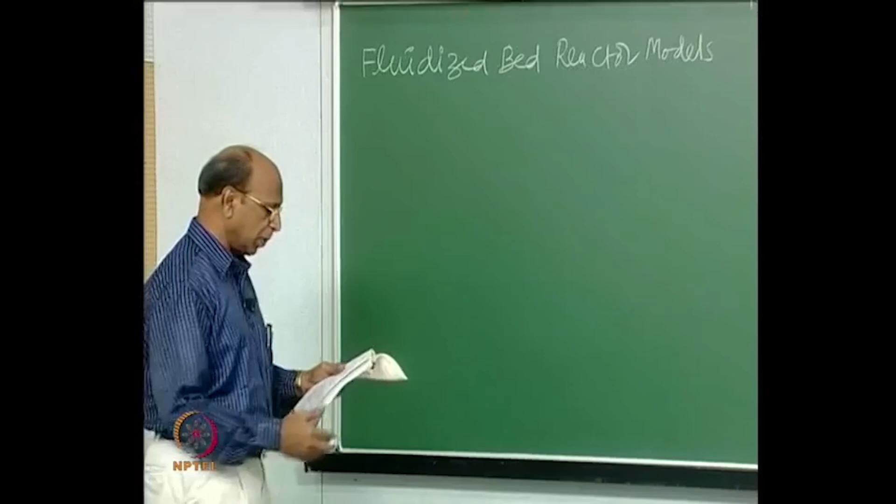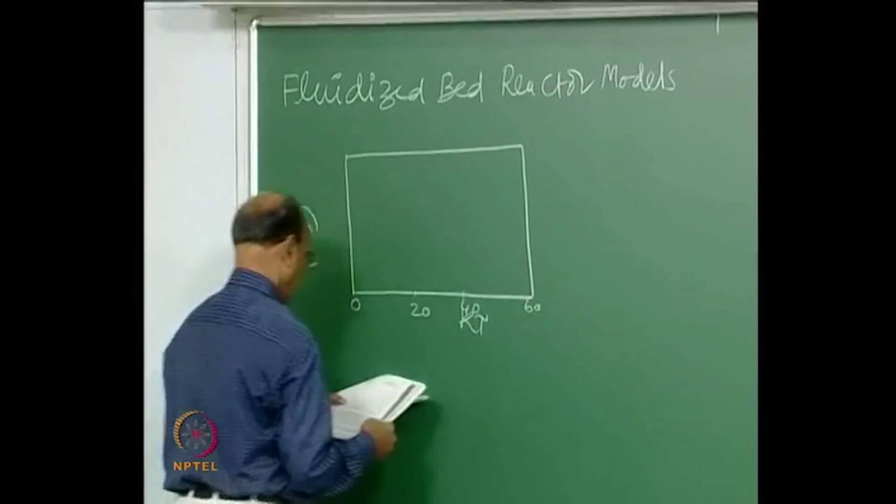When we plot conversion versus Damkohler number, this is 1 minus x a, k tau is the Damkohler number for first order reactions. This will be 20, 40, 60. Here you have 0.01, 0.1 and 1.

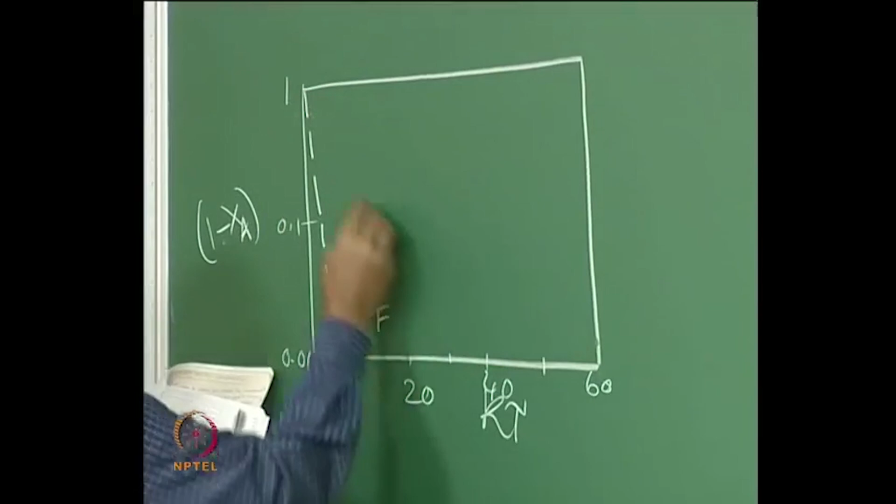This is the straight line, this is the plug flow line. This is the mixed flow line, and the points what we have, okay.

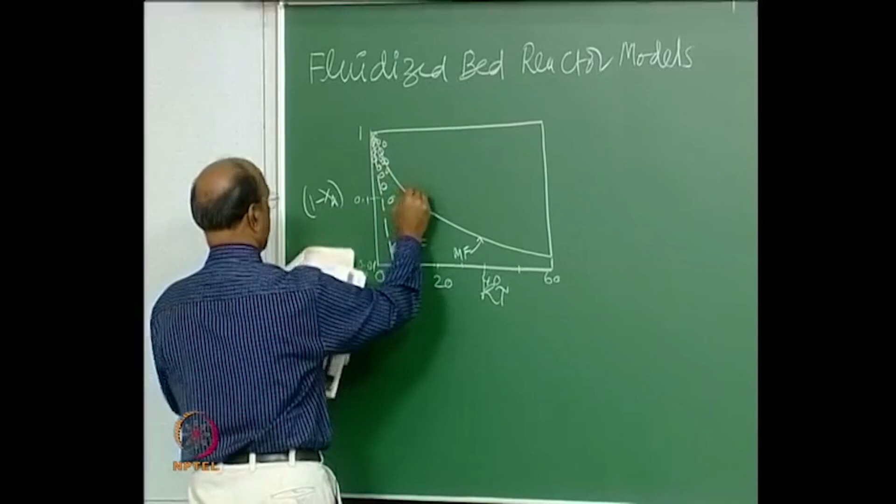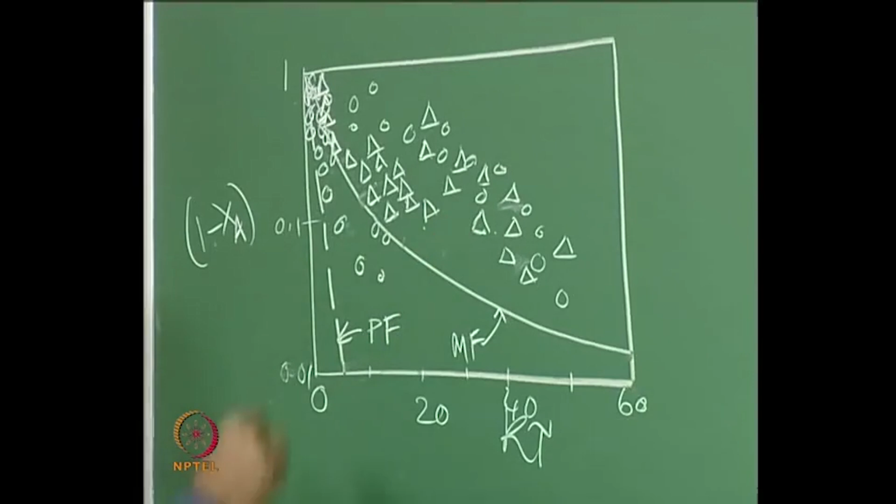This is one category of particles, and we also have another category, triangles, I am putting. Okay, so this is the kind of behavior, and the circles are

Geldart A particles, A group, Geldart A group, and the triangles are B group, and some of them are AB group also. AB group means the borderline between A and B.

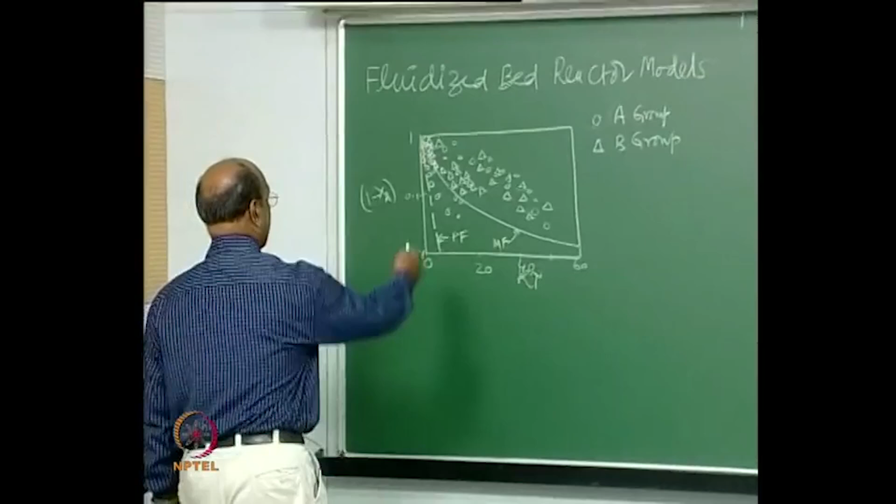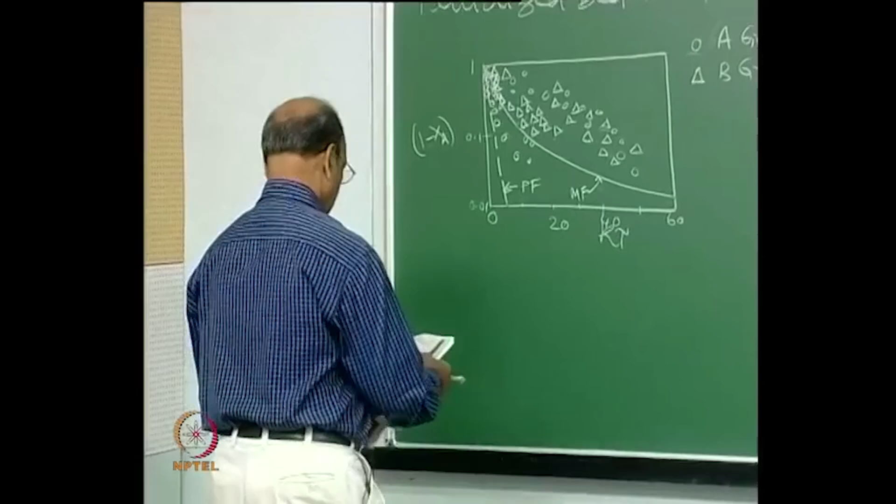So under these conditions, I think the researchers could not predict what is really happening in the fluidized bed, because this is mixed flow, this is plug flow, and many points are away from the mixed flow reactor. So that means there is something serious happening in the reactor. If you look carefully into the reactor at what is really happening, one should find out, otherwise simple models like mixed flow and plug flow cannot predict the conversions. So that means the first attempt, like our ideal reactors, failed, that is one.

Ideal reactors failed in the sense that they could not predict the conversion, right. So then logically the next one is single parameter models.

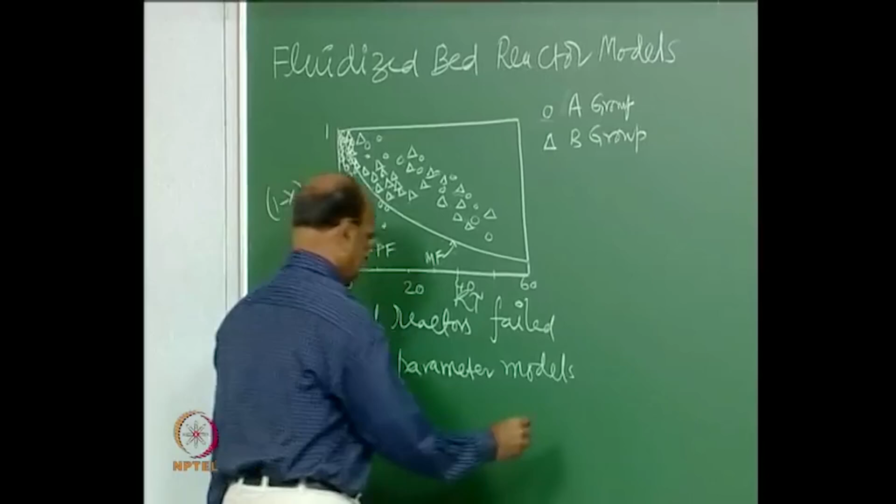Models like the dispersion model, and the tanks in series model.

Recycle model is not valid here, because what is recycling there, it is not right. You should have an external recycle and again come back, that is what recycle model is, but here that will not arise. So it is only these two models that have been tried.

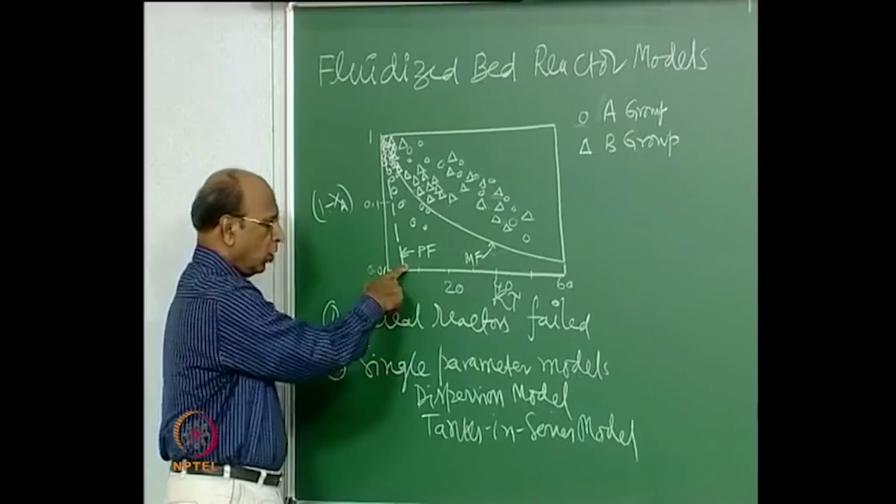So even if you want to predict these two, this is zero mixing, no, this is infinite mixing, this is zero mixing, plug flow. So all these models should also be somewhere in between, right, because this is intermediate mixing. These two models will give me something in between, like if dispersion number equals 0, it is plug flow, dispersion number equals infinity, it is mixed flow.

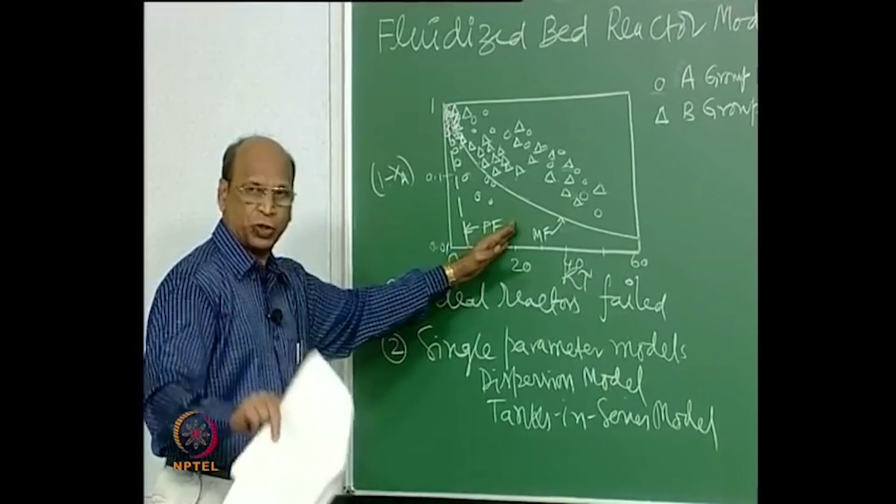So that means even these models, if they are really valid, all the data must be somewhere here, but not away from this boundary, right. So then people tried RTD models, that is number 3.

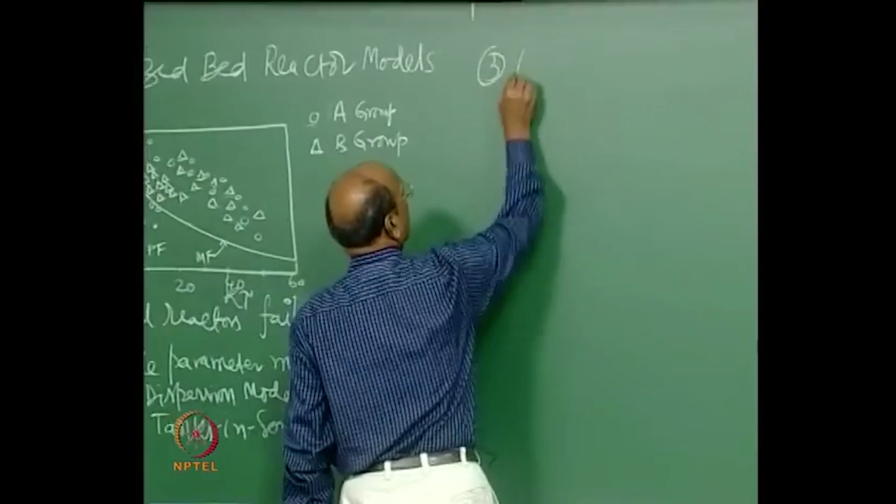Please remember, even though we discussed these two under RTD models, just to understand easily, even without RTD I can derive this dispersion model and tanks in series model, right. You take one tank, next tank, what is going in the first tank comes to the second tank, goes to the third tank, everything is perfect mixing.

And when you go to the dispersion model, you take ideal plug flow, and over that you put the dispersion term. So that means the Fick's law term, D effective diffusive, or diffusivity, multiplied by dou C by dou Z term will come along with your convective term.

Okay, I think this is what in packed beds also you have seen, we have so many terms. If you are able to take only the axial dispersion term, convective term, and reaction term, that equation can be solved. I also gave the solution for first order reactions in the last class, in the last semester.

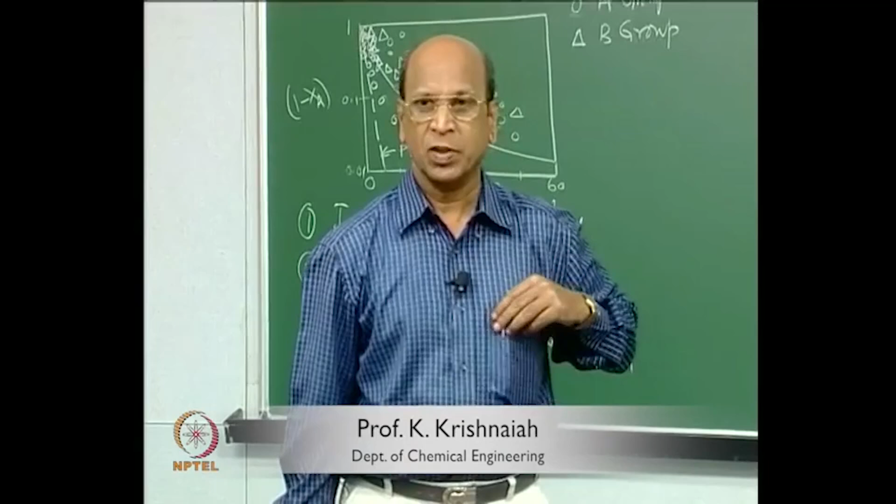So that is why it need not be categorized under RTD models, because you may be thinking, this fellow discussed these two under RTD models last time, and now separately he has written these two as a separate category and RTD model as a separate category. RTD models, the way we are discussing here, mainly take dead space into account, channeling into account, bypassing into account. Channeling and bypassing have slightly different meanings. So taking all that into account, RTD models have been tried. But RTD means residence time distribution models, right.

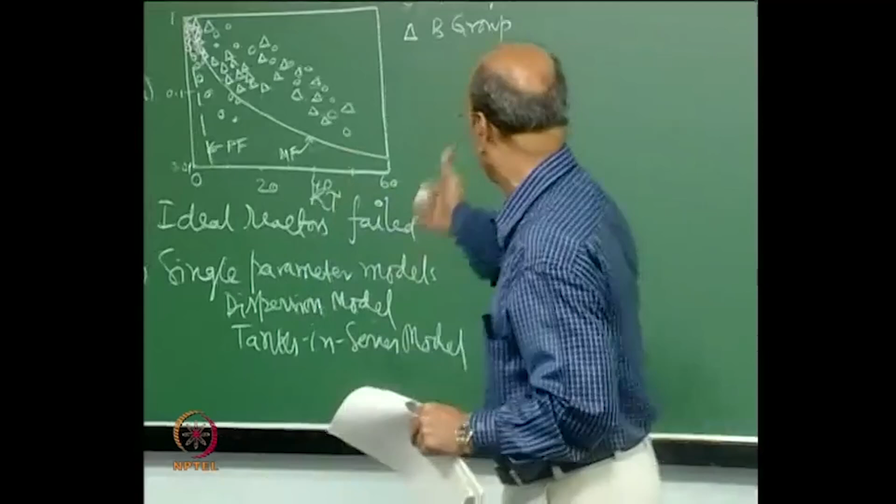When you look into the fluidized bed where the solid particles are catalysts, if you look a little more closely, we have bubbles and we have solids. If there are no bubbles, wonderful, because every particle would be contacted by the gas, and you could clearly find out what kind of mixing is going on, whether it's a single parameter model or ideal reactors. But without bubbles, even fluidized beds cannot exist, because to have a little mixing of the solids, bubbles must form.

You cannot operate exactly at minimum fluidization velocity, because then it becomes mostly a packed bed. So when you go away from minimum fluidization velocity, bubbles will form, and particularly in large diameter industrial columns, they operate at 20, 30, 40 times minimum fluidization velocity, because they want to keep all the particles under fluidization conditions. That is why that extra gas is definitely necessary.

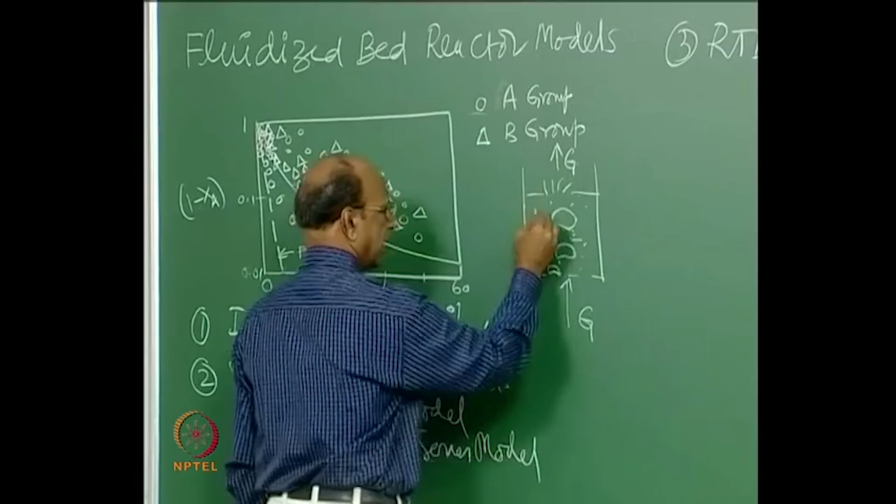What I am trying to say is that you can never avoid bubbles. So that is why in the RTD models, let me draw a simple fluidized bed here. Okay, this is enough, three bubbles, these are the particles, and one bubble may be breaking here. So, gas enters, and these are the catalyst particles. Most of the gas is going in the form of bubbles.

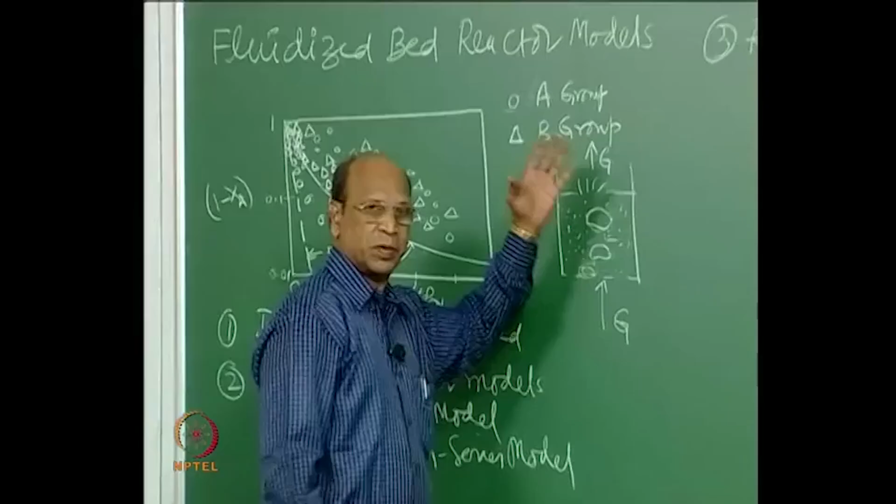Whatever gas is more than necessary for minimum fluidization velocity, all the extra gas goes in the form of bubbles. That gas will contact only the solids around the bubble. This means the gas in the bubbles will see only a small number of particles. So the residence time or contacting time between these bubbles and the solids is very small, because bubbles are moving up, whereas in the emulsion phase, the gas is moving at minimum fluidization velocity, which is very low, so there is sufficient contact there.

That means, if you remember the RTD equation for first order reactions, what is the equation for conversion using the RTD model?

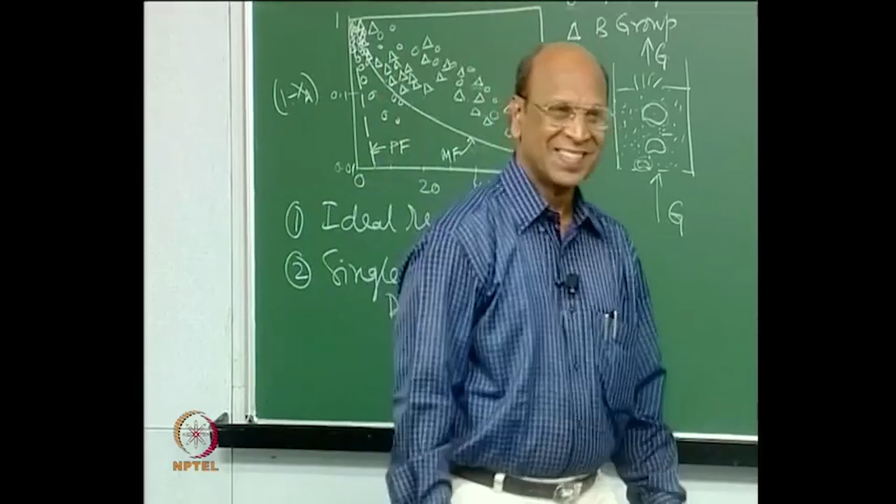First order... Abhinav, are you telling something? Yes, 1 minus xa equals, for first order reaction using RTD... that is all, e power minus k tau. e power minus kt into e of t dt, integral 0 to tau, 1 minus xb of a single particle. What is this tau? 1 minus xb of a single particle, you are thinking of a non-catalytic reaction. I am asking in general for first order reactions, what is the RTD expression? See how many times I am right, that is only remembered from that semester, afterwards no.

Okay, I think Abhinav was telling something about the integral. Before the integral, what do you have? 1 minus xa, let's take that, okay. C by C naught of a batch reactor, into e of t dt. Excellent, but not 0 to t, it's 0 to infinity, not tau.

So that is the equation we have: Ca by Ca naught batch, for a first order reaction. What is the equation for Ca by Ca naught batch? E power minus kt. That k is the reaction constant.

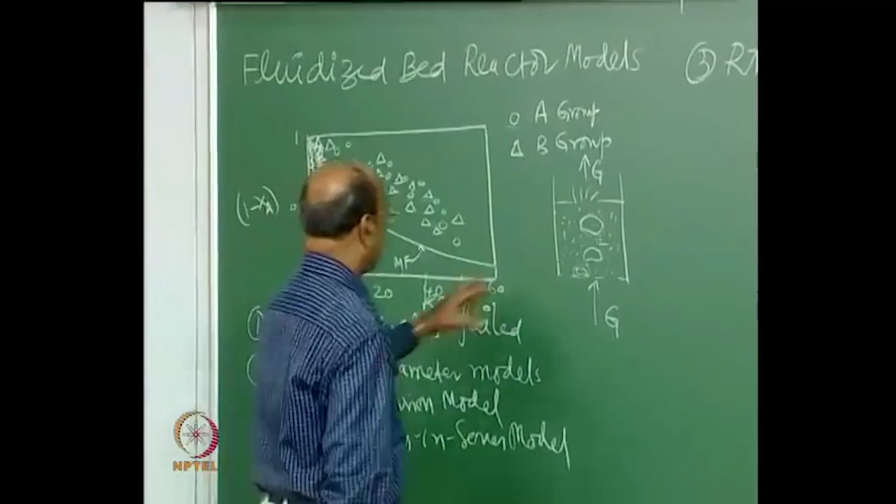So that constant will be different for the bubbles, because the contact time is different, and that constant will be different for the solids in the emulsion phase. This means you need two constants: one small constant accounting for the bubble movement and the solids surrounding the bubble, and another where the k is slightly larger for the emulsion phase. That is why getting this information from RTD models becomes a big problem.

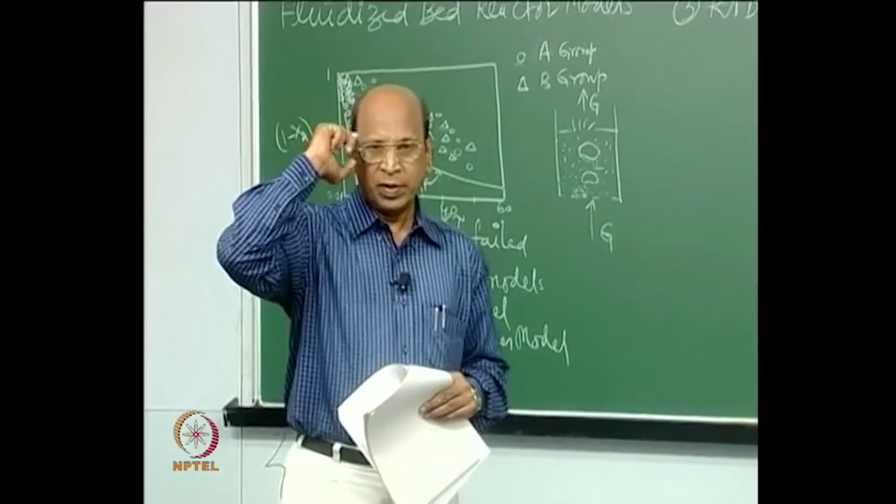So then they abandoned that idea. The RTD models also cannot predict this, because we don't know the exact k value, since we need two k's: one for the solids surrounding the bubbles, and the other for the particles in the emulsion phase. So the emulsion phase is contacted by gas in a different way. This is actually a beautiful lesson for modeling. Fluidized beds are a wonderful lesson for modeling, showing how you look deeper and deeper, and finally what do you do.

So initially all of us start only with ideal reactors, but they failed. Then the next simple step is trying to find out whether single parameter models can predict the conversions, but they are also not sufficient. Then slightly more complicated RTD models, but we also have problem because we are not able to get two k's for this. So it is the same information, same equation, same information, but RTD models failed.

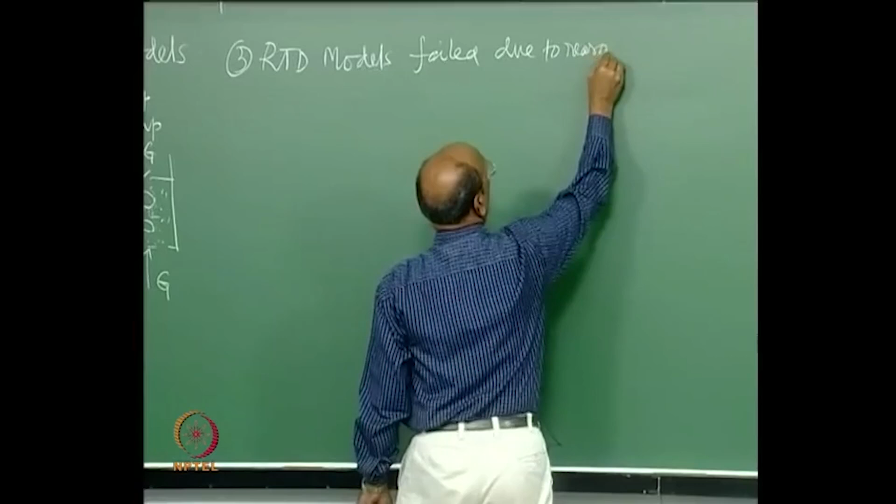That also I will write. Failed due to reasonable k value, I hope you understand. K means reaction rate constant value. Reasonable k value means whether it is a small constant or large constant depending on the contact, the bubbles or the emulsion.

So then the same information someone started calling that as CTD models. Heard of CTD models? RTD is residence time distribution, CTD is contact time distribution. These are the new class of models which are used only for fluidized beds.

Actually, that will be a good term even for us. What is our contact time distribution? How many classes you come, at least physical contact. Mental contact I do not know, unless we go to avatar and then put your pigtail and my pigtail together, then only I will know mental contacting, but otherwise physical contacting is only, yeah.

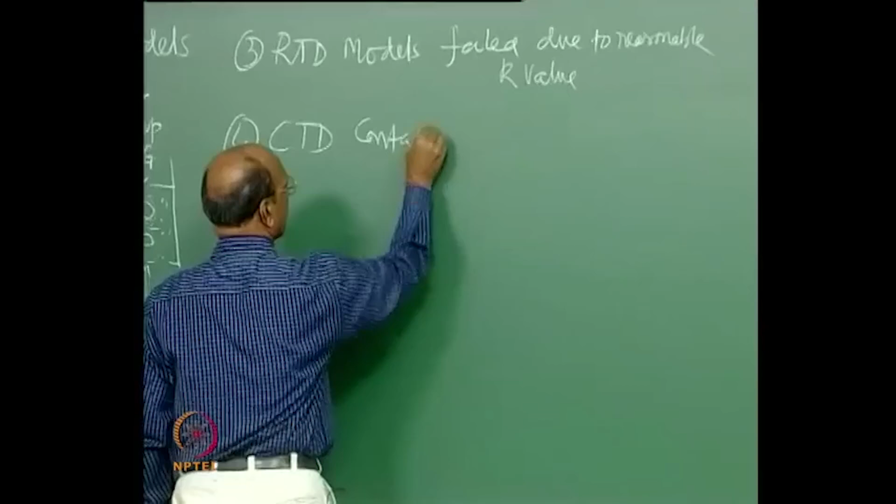So this is contact time distribution, distribution models. So here in the contact time distribution models, they assumed it is the same thing as RTD only, but I think only some researchers, which at this present time you may not be interested in.

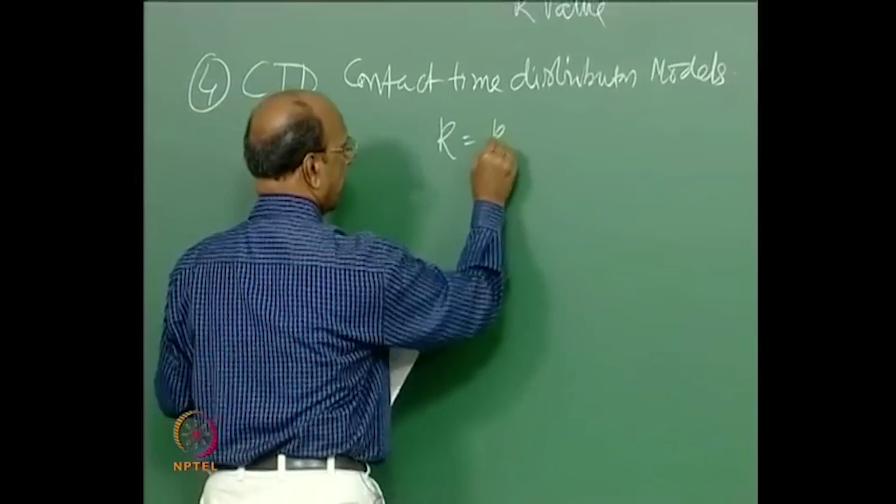So what they have taken was a k, that is, k equal to k0 t to the power of m, where m is the fitted parameter, depending on large contact or small contact. So this equation they have used with a meaning.

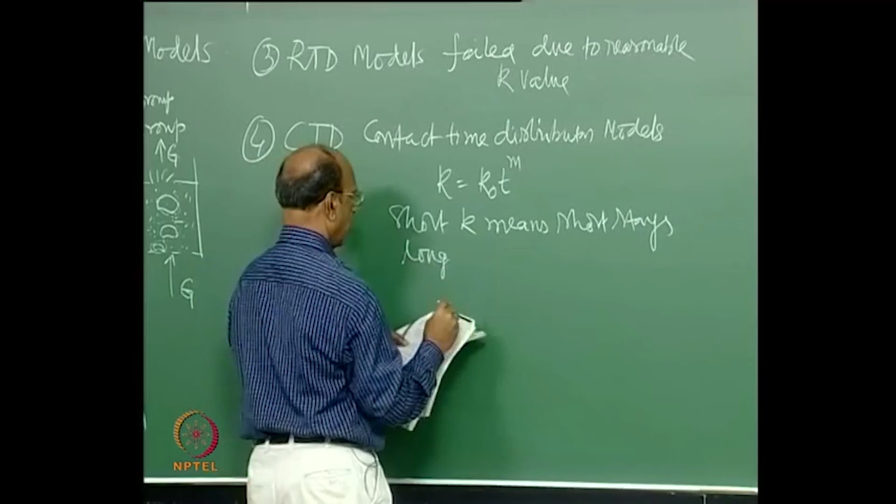Short k means short stay in the bed, that is bubbles, long stay means large k means long stay. So you can now see this must be bubbles, and around bubbles this must be emulsion.

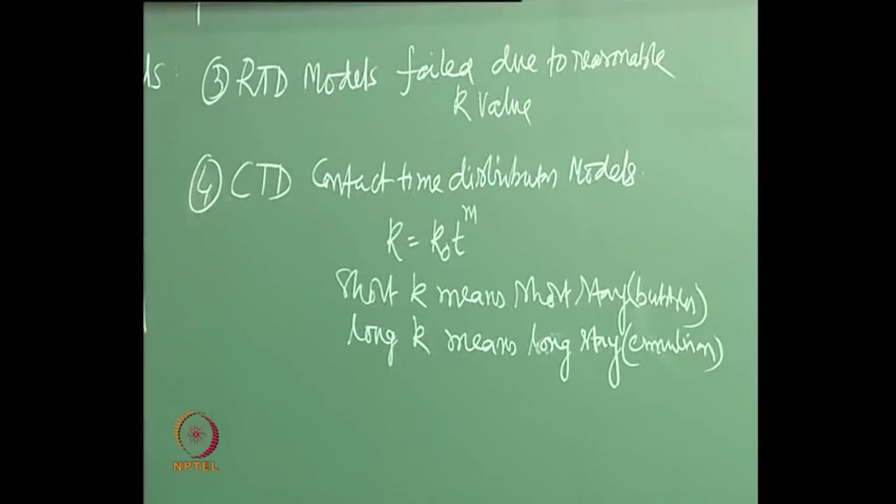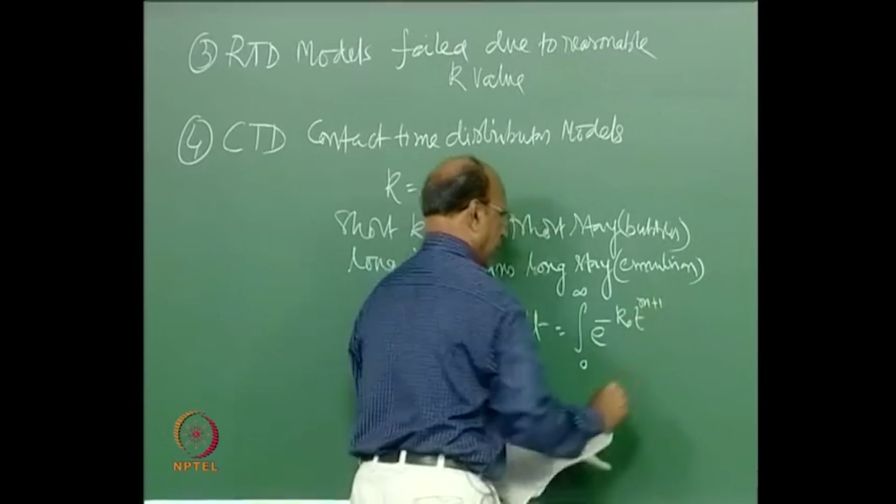So now you can see that your equation, C A bar by C A naught, equal to integral from 0 to infinity of e power minus k t, e(t) dt. Straight we have taken e power minus k t because it is first order, we are talking about only first order. This also can be written as integral from 0 to infinity of e power minus k0 t to the power of m plus 1, e(t) dt. This is straightforward, correct.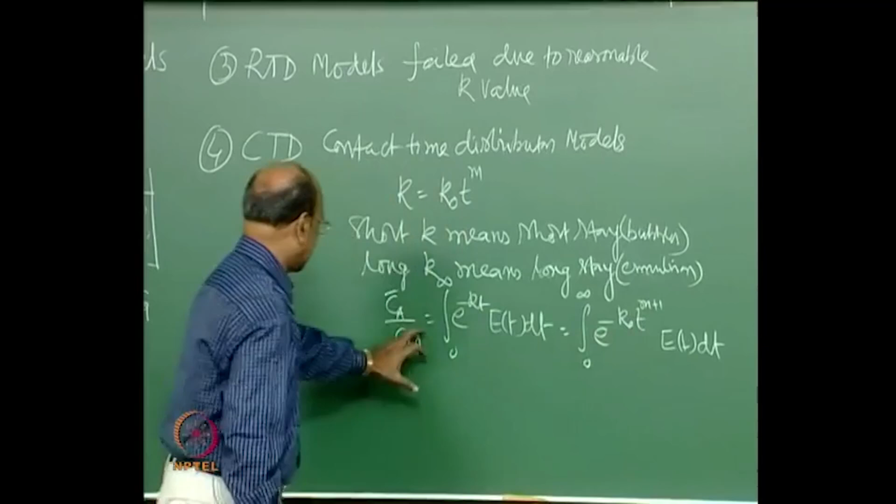Now we have substituted for this k here, k0 into t to the power of m. So then what they are trying to do is you have now 1 minus x a, and you try to fit this m, so that you will get, t to the power now m plus 1. So the m you adjust such that your x is described or predicted by this equation, but they found another problem. What is the problem?

The problem now is how do you get E(t), this residence time distribution function. How do you normally get E(t)? You have done the RTD experiments, no?

Yeah, concentration versus time, and then get area under the curve. Then divide each concentration by that area, you get E(t), and E(t) dt will give you the fraction of material which stayed between time t and t plus delta t. So that is the definition we know, but the problem in fluidized bed is there also, when you are doing, fortunately you are doing with the liquid, right.

So then once it comes out, you put in the outlet a probe or try to collect the sample and then analyze. Did you use probe or collected samples? I think in our labs, Prabhu, do you remember? I think we did some collected sample and titrated. Collected only and titrated, okay. But did any others use some probes and all that? In Osmania University you used probes.

Oh, here you are now trying to change. You already changed, okay. But you changed it, is it used for BTech next time? Next semester it will be. Next time, okay. So that is the one, I think that was the simple one you have been doing for a long time back, and I don't know what happened in between. I think the tracer used is CCl4, I mean NaCl.

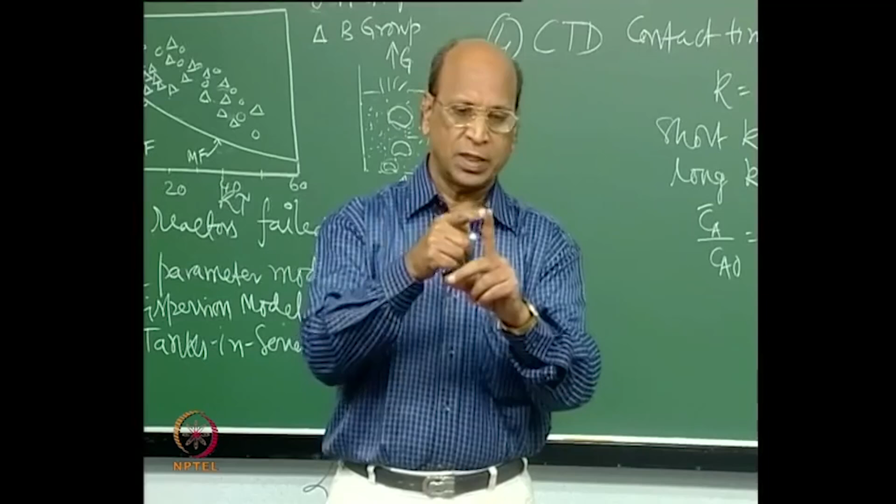Okay good. So the important assumption there is, once the liquid crosses the probe, it cannot go back inside. It is only once-through flow. So whichever tracer you are collecting, once it crosses the measuring port, it cannot go inside again. If it goes back, then it is hell, you do not know how to characterize it.

Another peculiar thing for RTD is we always talk about only one inlet, one outlet. The theory becomes very complicated the moment you have multiple outputs, even with single entry. If you have multi-input and multi-output, you'll have much more problems. That's why no one uses these multi configurations, but logically for chemical engineering, a reactor will have only one inlet, one outlet. Why should you have two outlets? In general, all the time, that is a good point.

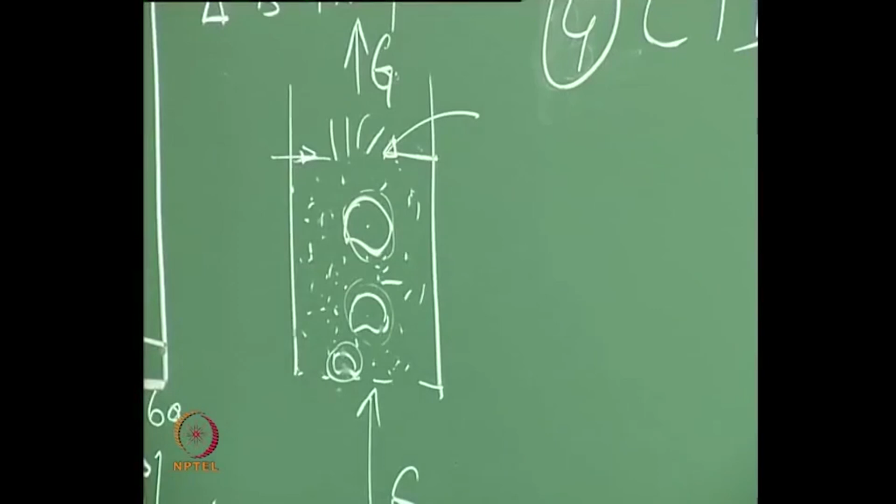But here what happens is, when the bubbles go, you put the probe somewhere, maybe at the center, or put some 4 or 5 probes across the cross section. What happens is, when the bubbles go, they take the solids with them, go to the top, then come back, because they just go up, break, and then solids come back down. I will also give you a figure, this explanation will vary.

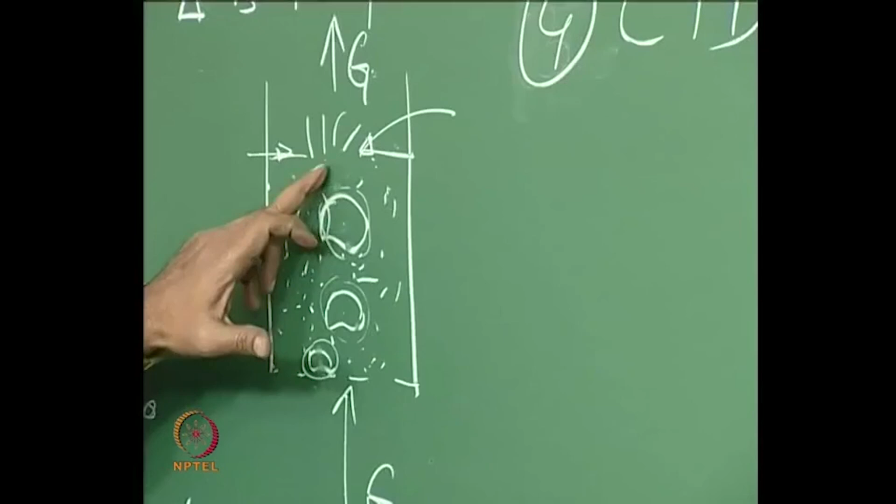Normally the gas will try to find a shortcut through the bubbles, because resistance is less, no solids. There may be 1 or 2 solids which get caught, but most of the time gas will try to bypass through the bubbles. But when the bubble is moving much faster, it does not allow the gas to bypass, instead the gas tries to recirculate like this when it is moving faster.

It's like circulations, when you stand near Mount Road for a bus, assuming it is midnight, 12 o'clock, because there's no traffic and vehicles go very fast. Otherwise, here more than 5 kilometers an hour no one can move, right now if you go. So there you cannot see this effect. When the car or bus is moving very fast, behind it you will definitely see some kind of low pressure. You yourself will feel this when it is going fast, like trains going and we are standing on the platform.

So that is a kind of bringing back the air which is very near to the surface. This has been proved by Davidson and others theoretically, I will give you that some other time. So this gas will go, break, and again try to come back. That means once it crosses the probe, it is not leaving the bed, but coming back again. You already found out its residence time, but the same packet of gas is again coming back.

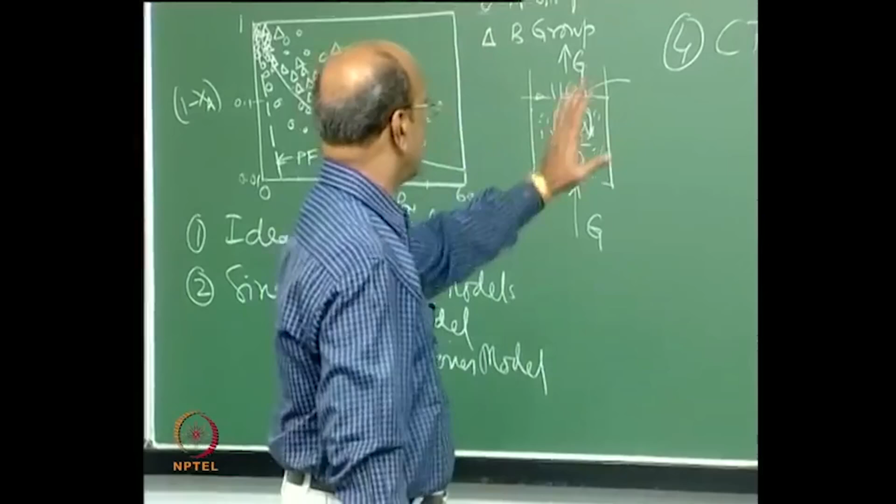So you're not able to find out what is the meaning of actual E(t) - what is the definition of E(t)? Again, fraction of material staying between time t and t plus delta t, but which delta t do you take now, because the flow is going out and again coming in, going out, coming in. That is why people said CTD models, RTD models both failed, because this is RTD information. So this also failed because the E curve failed.

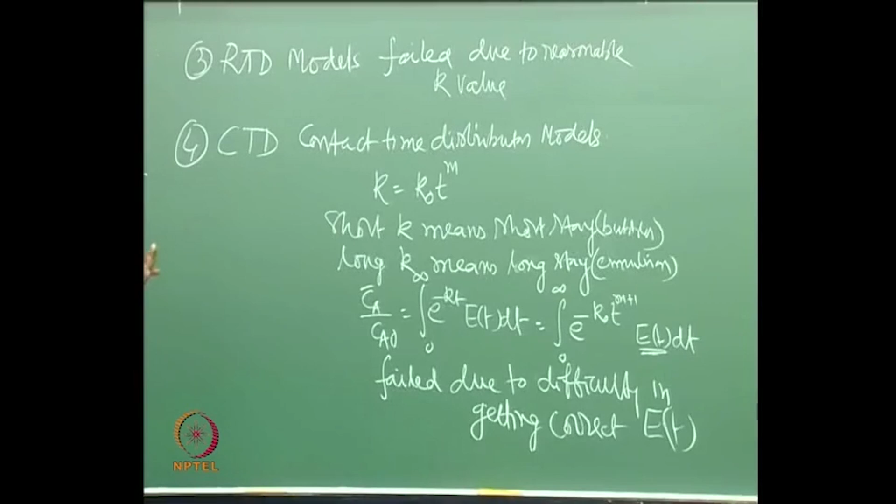Due to difficulty in getting the correct E(t), the residence time distribution function. Earlier it was the K problem in RTD models, but here it is the same problem, which we had forgotten in the beginning. This problem also exists even in RTD. RTD models failed not only because of the K value, but also because of the E value. Here we are specifically saying it is due to incorrect E(t) which you are measuring, and without measuring correctly you cannot have any equation for this kind of complicated system.

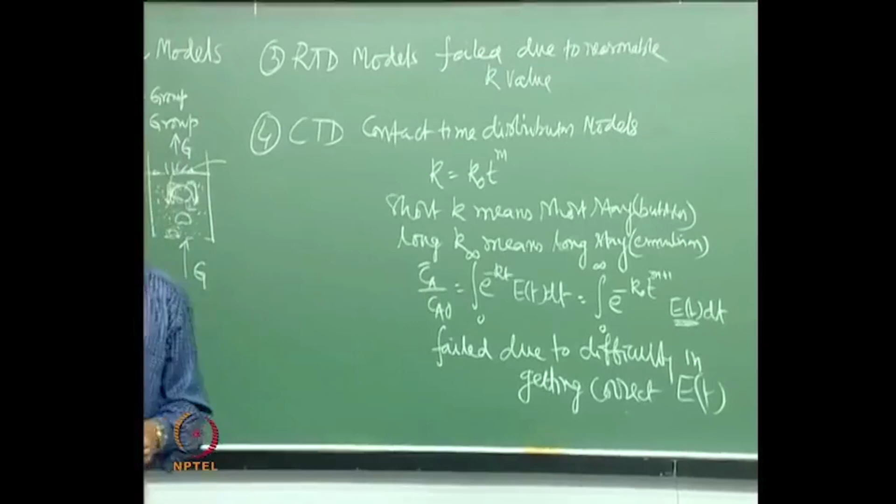Then people ask, what else now do we have to do? So what else can you do now? All simple operations have failed.

What is the next one? People really thought, okay, now let me go and see what is really happening. Till then it is imagination. Some bubbles are there, bubbles are going, right.

So let us really focus on the phenomena that is happening in the bed. That is what I have been telling all the time in my classes, that the physical phenomena is much more important than the mathematics. If you understand that, then automatically mathematics will fall in line, right.

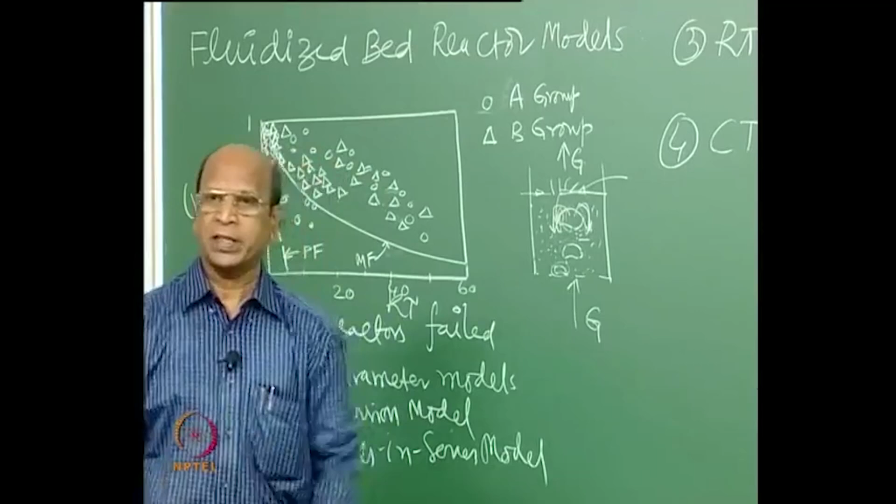So here a little bit deeper they wanted to look into. What they thought was, bubbles are there and emulsion particles are there. Now they thought, let me separate all the gas as one compartment, all the solids in another compartment, and some gas is going through this gas compartment, some gas is going through this emulsion solid compartment, both of them are coming and meeting there, but for the reaction to take place there must be some transfer of this reactant from the bubble to solid.

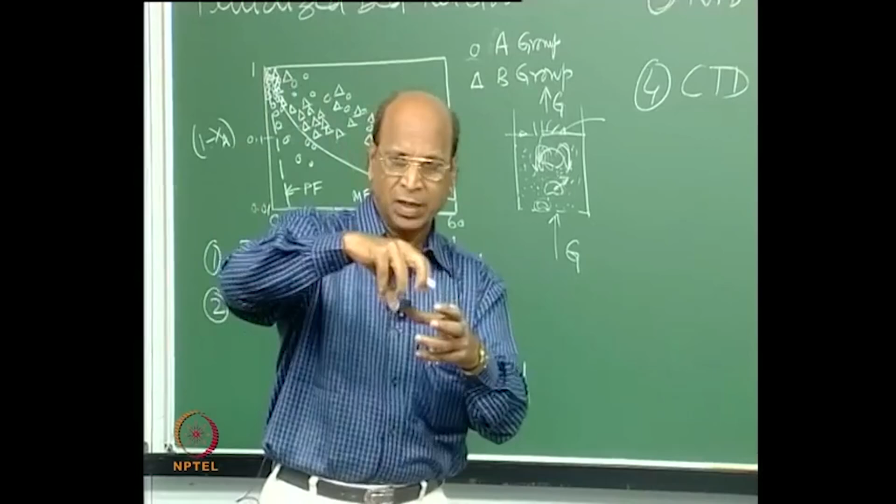You see, the physics is very simple if you are able to understand. The gas is moving in the bubble, but there is concentration gradient in the bubble, naturally, because reactant is maximum here only in the bubble. So it moves to the emulsion because of the concentration gradient diffusion. So then there is some transfer of gas from bubble to the emulsion.

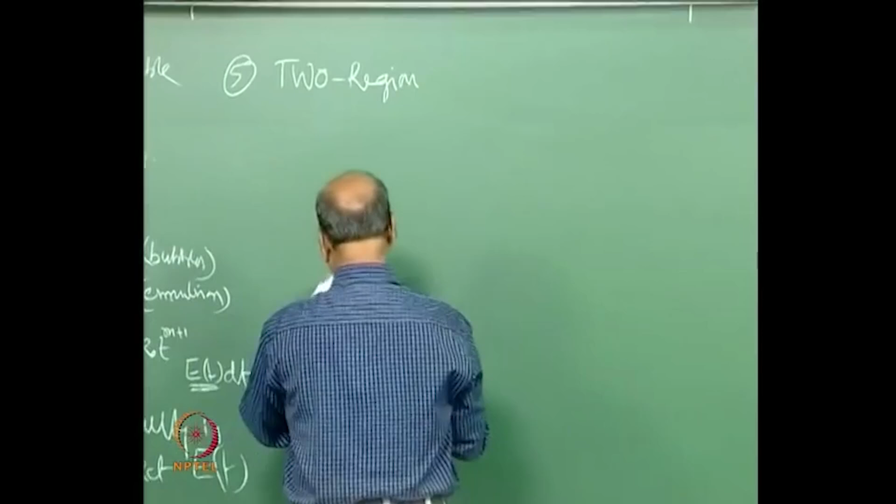So imagination now is, let me take bubble as one compartment. That is called two phase, two region model. Two regions or two phase also sometimes called, but two regions, that means bubble region and also solids region.

So imagination is, we have this is bubble region, this is solid region. So you have the amount of gas, this is V naught, volumetric flow rate, if you take this will be V naught. So then anyway it has to come, because what you see is at the outlet.

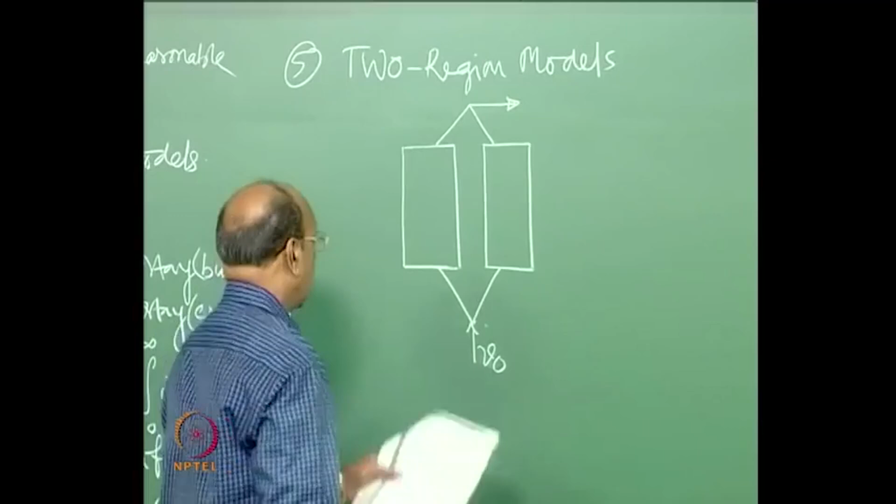At the outlet again you are not seeing these two separately, it is only your imagination, that is why model is always our imagination. So model becomes reality when you have mathematical description for all these things inside the bed, right.

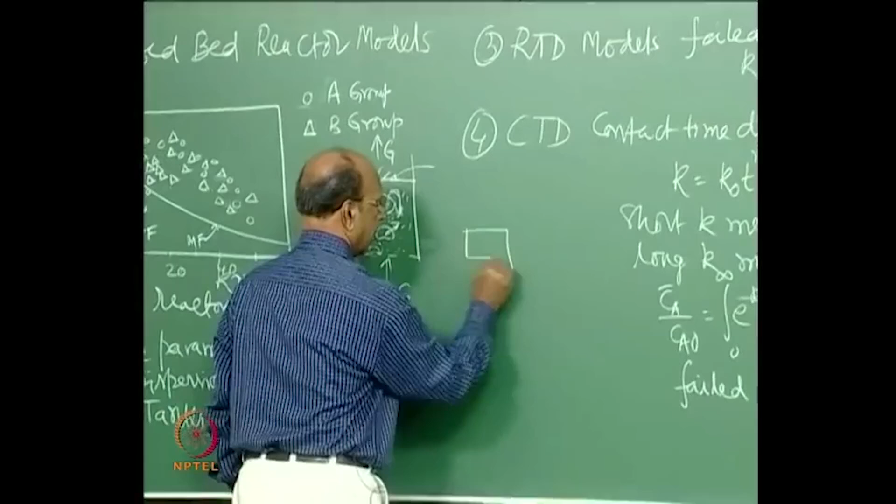So that is why again I will make you understand, when you go for your RTD models, we have drawn for CSTR with dead space and bypass. What did you do? You have done, this is the active zone, this is the dead zone, this is entering here, this is leaving here, and then this is dead zone, this is bypass zone. But what is this actually?

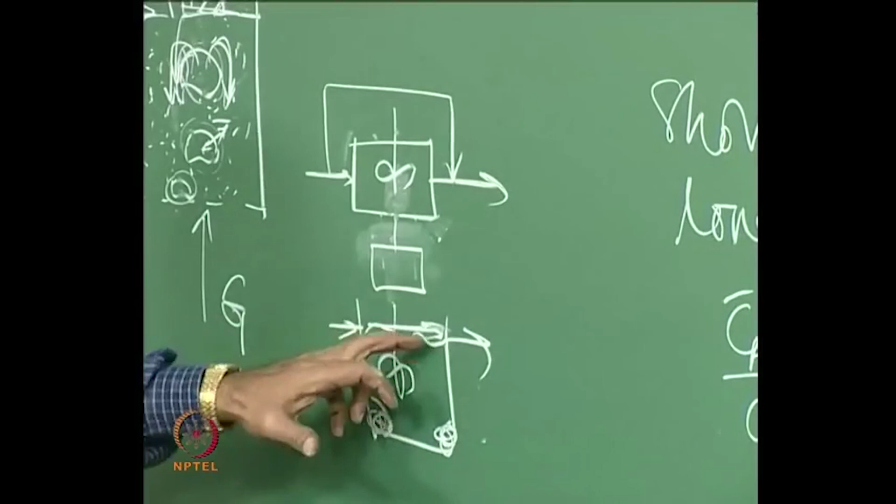Actually, I have a CSTR which is entering, which is coming, this may be dead zone, here it may be bypass. So now you see our imagination is, all this volume has put as dead space, all the other active volume is put as active space, and now whatever is going very quickly short circuiting, very quickly going out bypassing. So very quickly coming out, that is shown like that, because it is practically not spending any time inside the system. So this is an imagination.

So if I am able to write this and this and this, what are the equations, how much is entering, how much is leaving, and if I am able to solve what is happening inside this mixer, and then I have an equation, that equation is finally matched with my actual conversion in this reactor. So if this is matching with this model, then I think that I have bypass, I have dead space, and so much bypass, so much dead space is there inside, that is why the conversion is so much. That is what is the imagination.

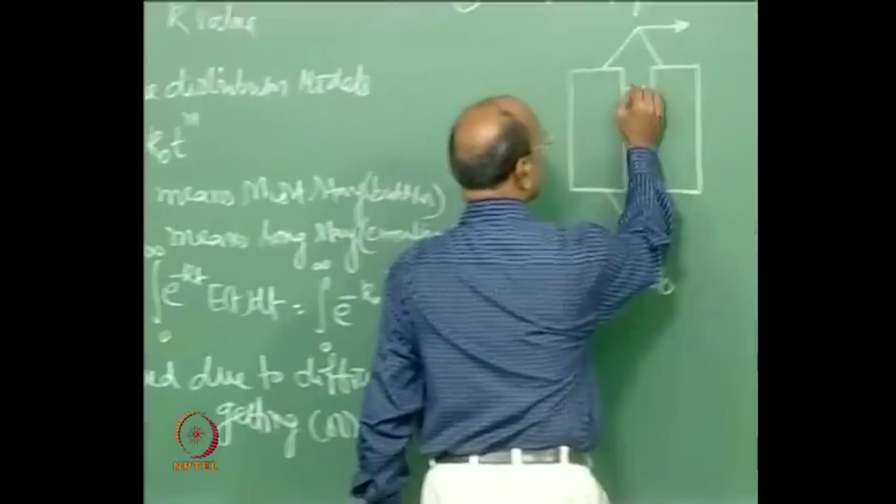So similarly here also the same imagination, all the gas in one region, all the solids are in one region, then we have the cross flow. So now this V naught will split into V1 and V2, we do not know how much. So then these volumes also we do not know exactly. So that is why we also just float as V1 and V2, capital V1, volume of gas region, volume of solids region.

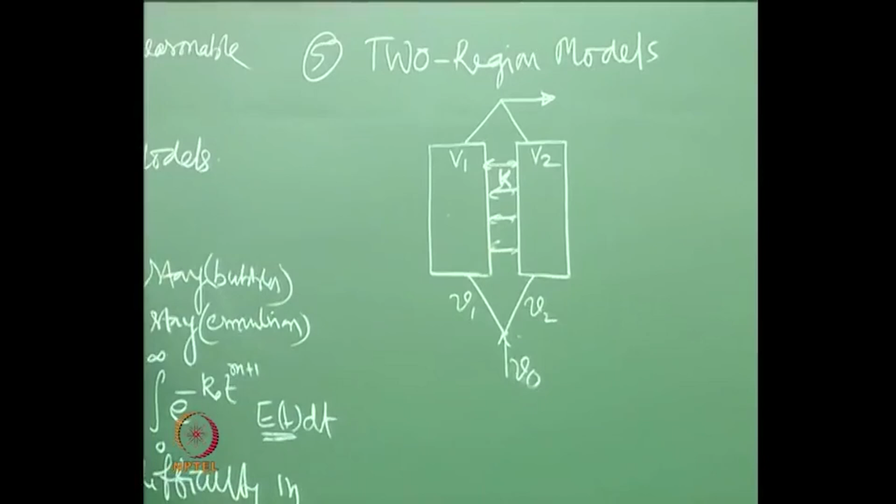Okay, good. Then this cross flow we will call as K. That means how many volumes of gas that is going into this. So that cross flow also we will take. Then in this region there is a flow, all the gas region there is a flow, all the solids region there is a flow for gas, right.

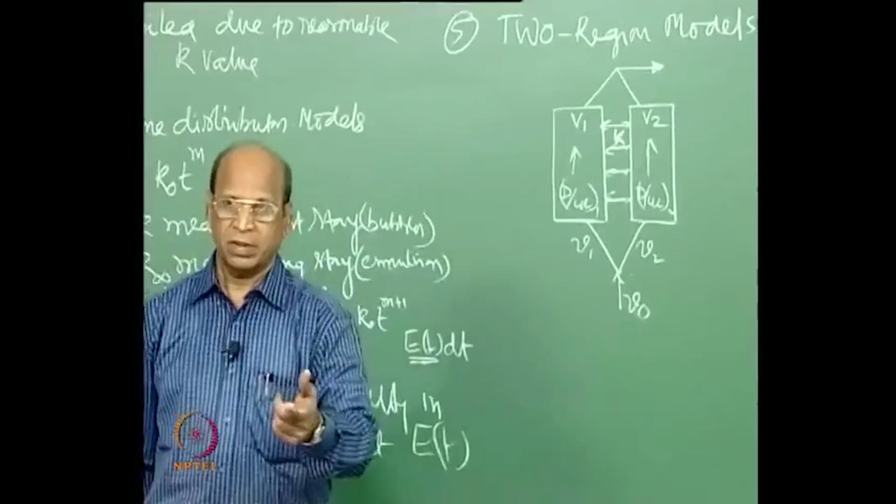So in this region we will say that we have a dispersion number d by UL 1, here you have dispersion number d by UL 2. There are many models, you can say this is equal to number of tanks. So I may take 10 tanks here, 3 tanks there for gas. So d by UL is almost equivalent to number of tanks, right. Each d by UL value can be also converted nicely in terms of number of tanks.

So that is why, how many parameters do you have now? V1, V2 are both not the parameters. I can take V1, one of them, that means V0 equal to V1 plus V2. Then I will know the other parameter. Then capital V1, another parameter. The total volume I know, right.

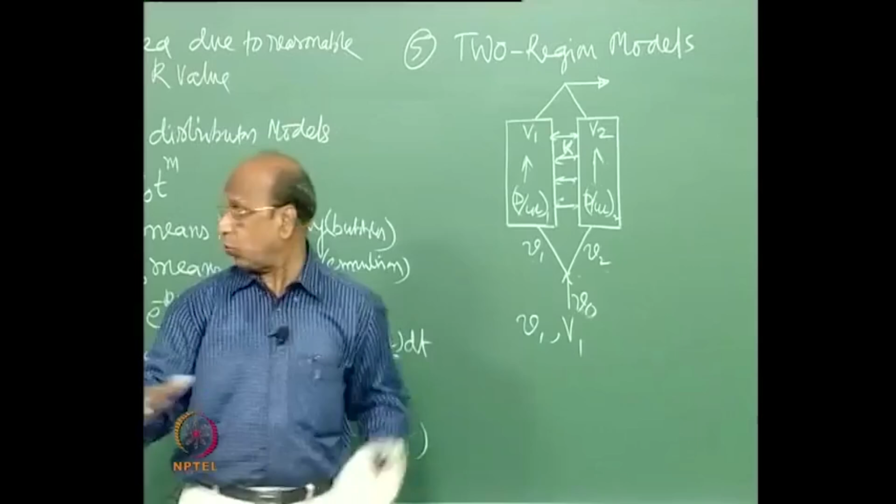So V1 plus V2 is again total volume, total fluidized bed. Okay, good, that is the one. Then this d by UL 1 and d by UL 2, this we cannot have. I cannot subtract one from the other.

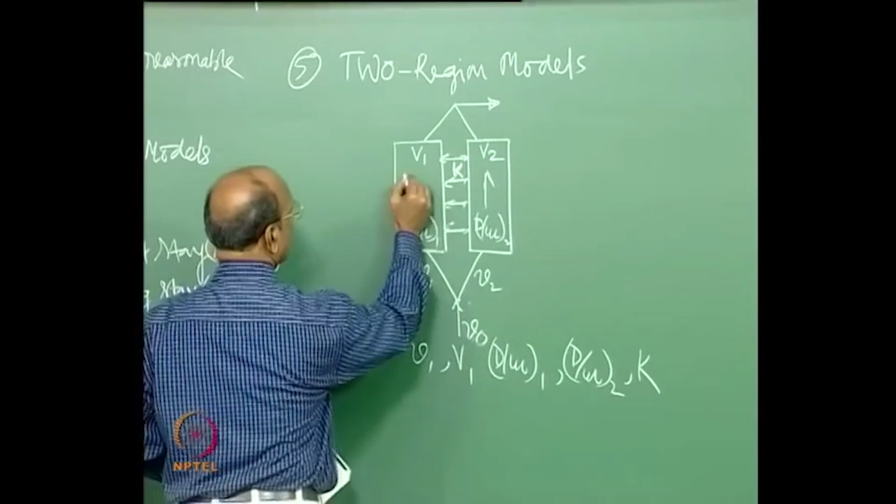And we also have another one, because I told you experimentally it was seen that even in the bubble phase there are some amount of solid particles. Inside the bubbles also few solid particles are there. So that is why what we call is that you have some amount, this is small m1, okay, small m1 is amount of solids or fraction of solids, let us say. So if I have totally 10 kgs in the bed, maybe 200 grams or 500 grams is in the bubble phase, that is also another parameter. The remaining will automatically be in the emulsion phase, right, because total amount I am taking in the beginning.

How many parameters are there? 6 parameters. So this is also called sometimes the 6 parameter model. The 6 parameter model beautifully fitted the data, excellent.

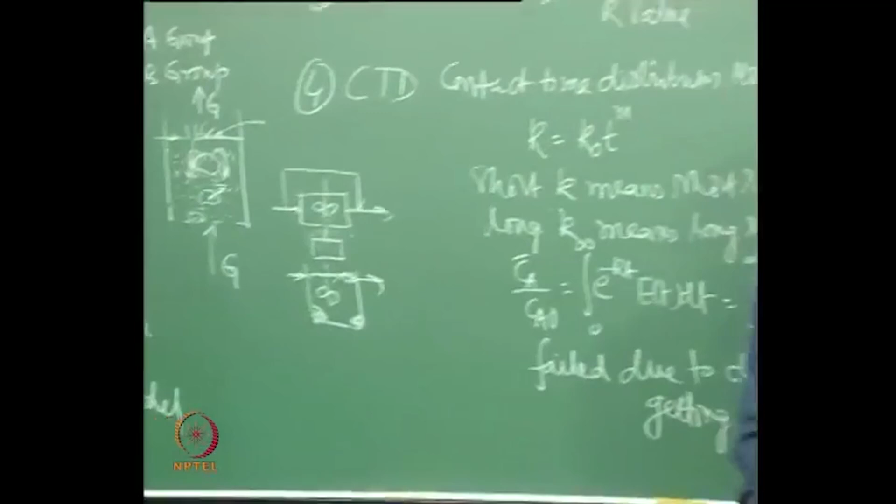Particularly these models were used for FCC reactors, like Mobil company, all these companies used this model in the industry and found that it is a beautiful fit. They could find out exactly what conversion is coming, because this FCC is nothing but a fluidized bed cracker, fluid catalytic cracker. Even though it is fast fluidized bed, inside you have only fluidization going on. So that is why they tried this model.

But it was so beautiful, people were very happy, but when they got the parameters, what is V1, V2, V3, it is beautiful, operation successful, patient very happily died. So what is the problem? They are getting V1 as -10. Is there any meaning for volumetric flow rate to be -10? Or even this V1 they are getting as maybe -20. That means even the physical values which are not supposed to have any negative values, they are able to fit the data.

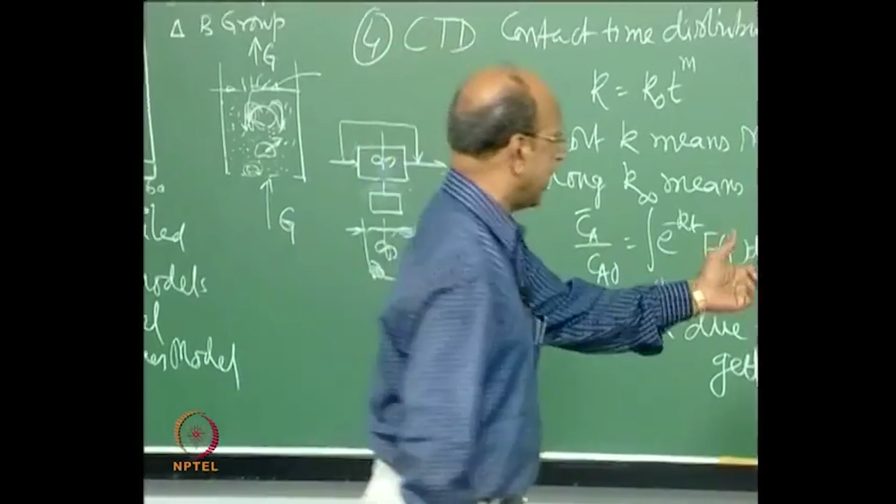That is why most of you also will do that. When you are doing your project, you go to the mathematics to such an extent you do not know what you are doing, then you do not know what is the physical meaning of those particular parameters. Here there is a meaning. You think this V1 cannot be negative at all, first of all. Even d by UL cannot be negative. Even cross flow cannot be negative, but they are getting 3-4 parameters negative and the remaining 3 parameters positive, yet beautifully fitting the experimental data.

So that is why they thought, yes, we cannot now understand fluidized bed, so they closed the books and went home. They could not do anything. So then the problem started, that when all these things are going on in universities, we do not have any other work except thinking. No, really that thinking is very important. We are not thinking anything now. Even if you think, it will be something nonsense, no sense there.

So those people in Cambridge University, there was a person called Davidson. He started thinking, no one is able to understand what is really happening in the fluidized bed. Let me just widely imagine that these bubbles are just like bubbles in a liquid, where you have a clear boundary and all that. And now let me take some properties which are not exactly liquid properties, but something away from liquid properties representing fluidized bed, and then let me simulate.

He simulated. When you simulated, he got wonderful information. I think he also would have jumped up and down when he first saw that result.

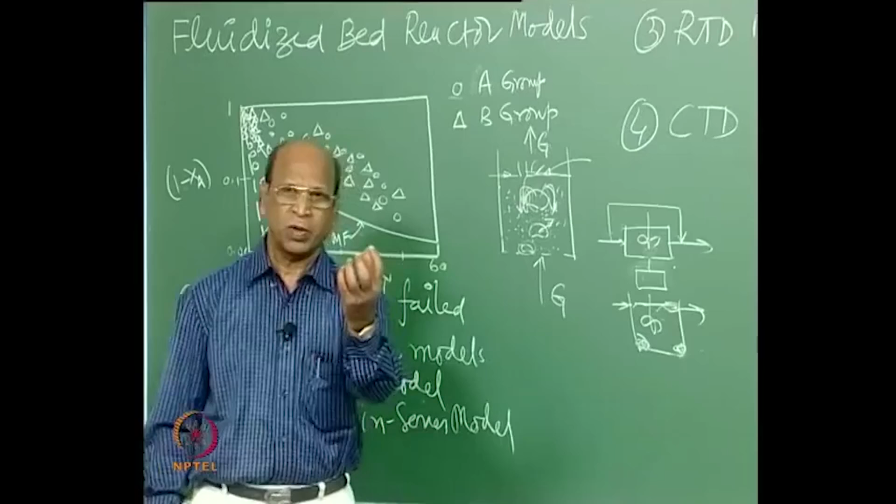So what is happening is, when he simulated the gas moving in the form of bubbles, depending on the velocity of the bubble, that is bubble rise velocity, he did it for a single bubble, assuming everything is at minimum fluidization velocity, no disturbance at all, only one bubble allowed to move. Then he simulated all the streamlines, gas flow and also solid flow around these bubbles.

He found wonderful information. He found that when gas is moving up, depending on the velocity, the first thing he found was that the gas is bypassing through the bubbles. That means the gas is taking the bubbles as a short circuit.

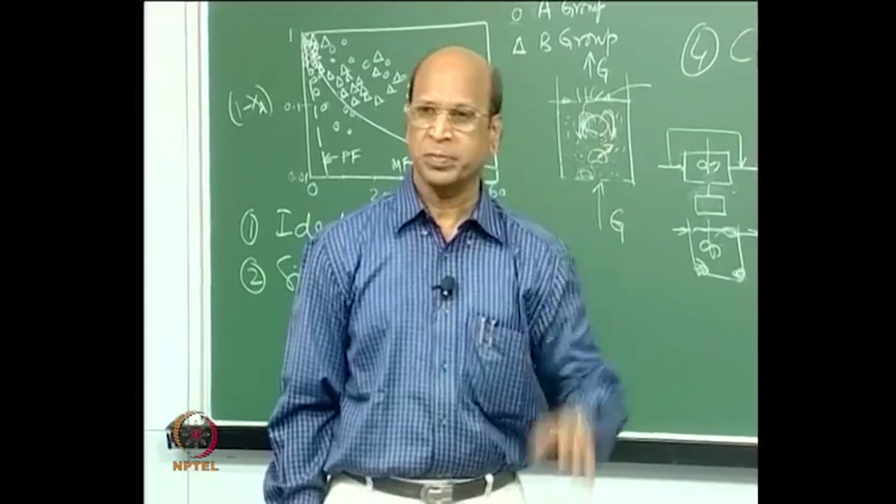Like, I mean, we are famous for that. For any work, we will try to have short circuits. If you want to get a visa or passport, we know what the short circuit is. You go to someone, give 1000 rupees, he will give you passport. That is the short circuit. So the gas also knows, because I think the entire nature may be like that only, doing short circuits only. So this gas also is trying to go through the bubbles, right.

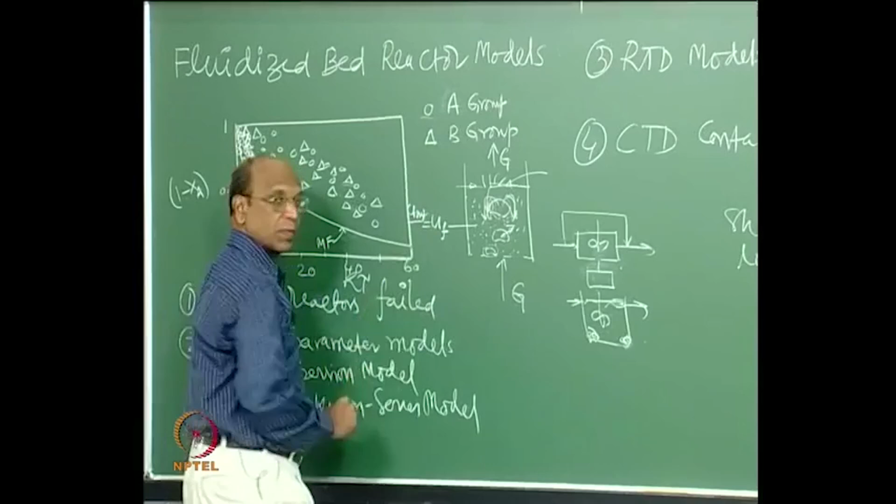But when the velocity of the bubble is increasing slowly from low to high value, that velocity comparison is, here I have what is called UF, the gas velocity in the emulsion phase. UF is nothing but UMF divided by epsilon MF, because our assumption is that the emulsion is at minimum fluidization velocity. So the minimum fluidization voidage, if I take, that gives the true velocity through the emulsion, that is UF. And here we call this one UBR, velocity of a single bubble. So when UBR is smaller than UF...

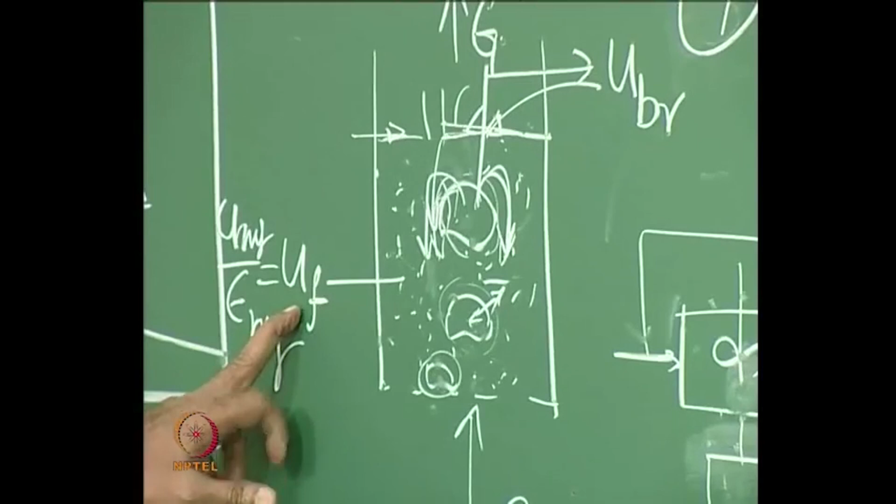What should happen? When UBR equals 0, stationary bubble. When it is a stationary bubble, very happily the gas is bypassing through that. So when it started moving a little bit, even then, till it reaches UF equal to UBR, it kept bypassing. But beyond that, at UBR equal to UF, and just beyond that, even a small value beyond, the gas is not allowed to bypass. It is going through the bubble, but again coming back, recirculation.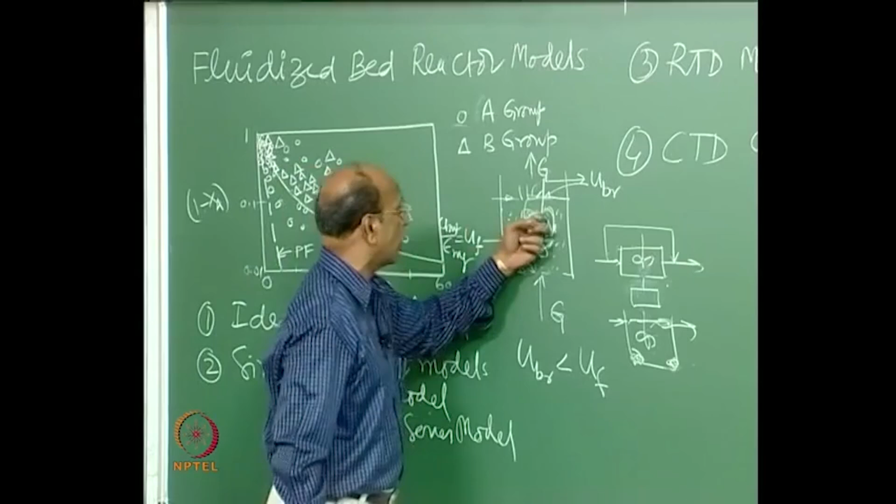And when he simulated for very high values of UBR, that is what bubbling fluidized bed, 30 times, 40 times, 100 times UMF, say UMF is 1 meter per second and UBR is 100 meters per second. Under those conditions, most of the gas is only recirculating within the bubble. See the beauty, recirculation is taking place only within the bubble, that means it is not at all allowing any gas to contact solids. Then where is the conversion?

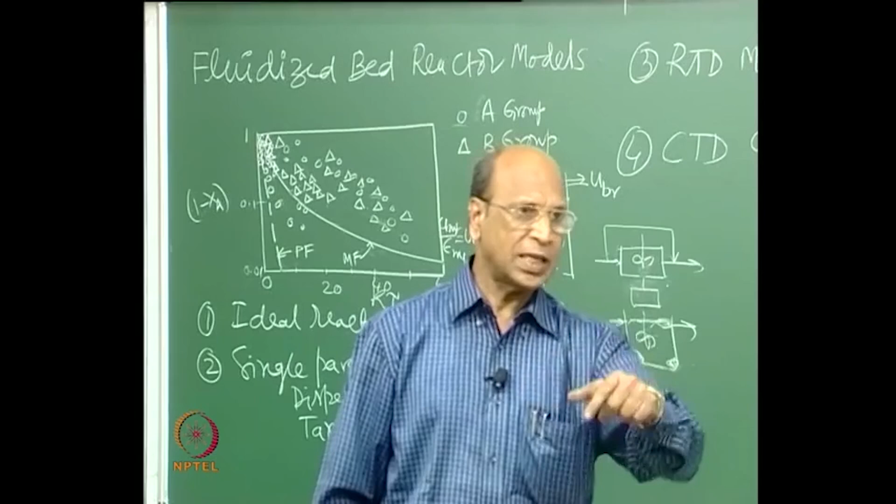That was the beautiful reason why you get these points, correct? Because you have solids, but there is no reaction, because there is no gas going and contacting there, and the amount of gas that goes through the solids at minimum fluidization velocity is almost very small. That is why you do not get much conversion in the emulsion unless this gas goes to the emulsion. That was beautiful. So that was one finding, that when the gas velocity is varying, and in typical industrial reactors it will be 40, 50, 100 times UMF, the UBR, then they found that under these conditions we definitely get less conversion, and that is one side about the bubble behavior.

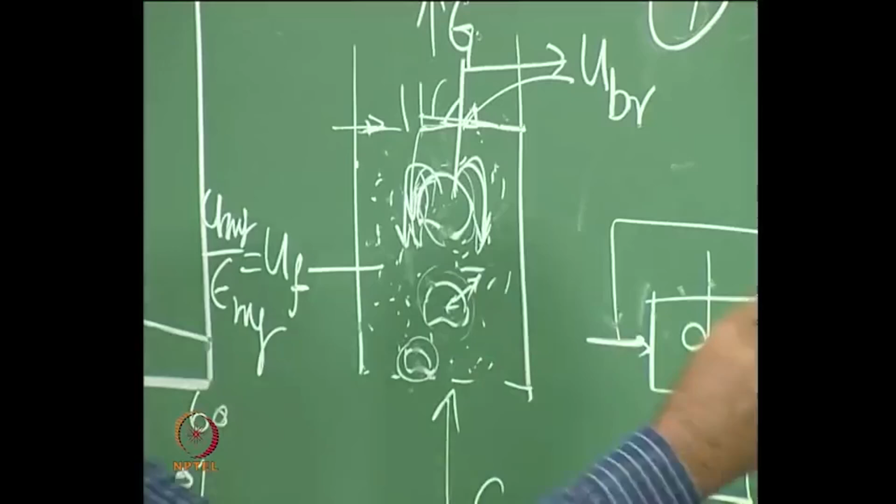Then some other person also showed that it is not just a circular bubble as assumed. As it is, most of the time we try to draw only bubbles like this, all the time we are trying to draw like this. This is the bubble, and here we have what is called the wake.

It is like an atom bomb shape also, when it is exploding. Behind it you have the low vacuum, low pressure region. So that also sucks all the gas from the surrounding, that will go there. Like that it also does, and along with that, when it is sucking, it also sucks the solids.

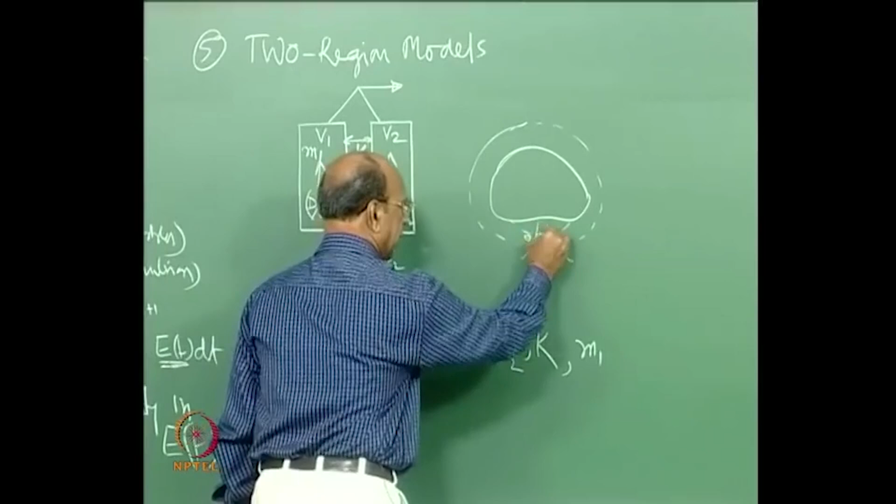It also sucks the solids, so that means in the wake there are some solids. When the bubble is moving continuously, during his simulation he found that for every bubble there is a definite thickness of cloud. That means the cloud is moving along with the bubble. Cloud will have certain thickness. Actually, this is the cloud.

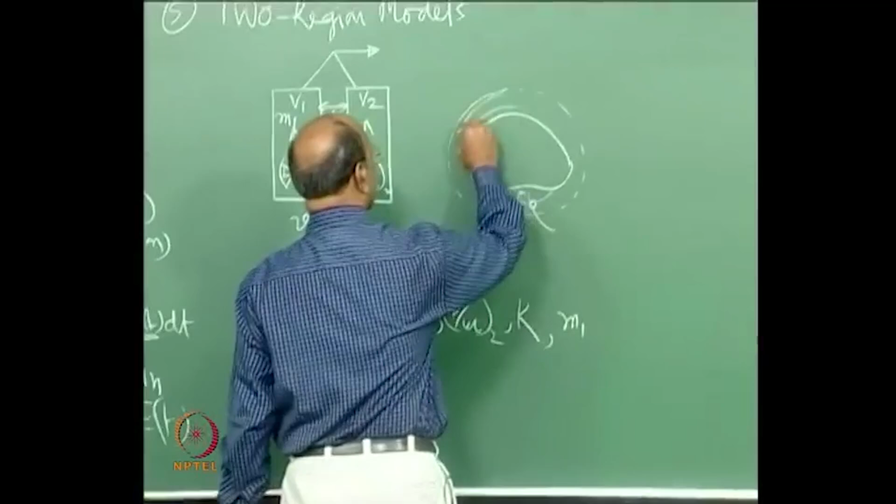Cloud means more particles, but this entire thing is moving, whereas other places the emulsion is just staying there. So finding out the cloud thickness, and also that it has got wakes, and wakes also have some solid material, gave some more beautiful imagination for us.

The two phase region, what we have here is bubbles, and inside bubbles we have some small fraction of solids. Now all these remaining solids are not in the emulsion, but some of them are in the cloud and also the wake. That means definitely you will get more conversion.

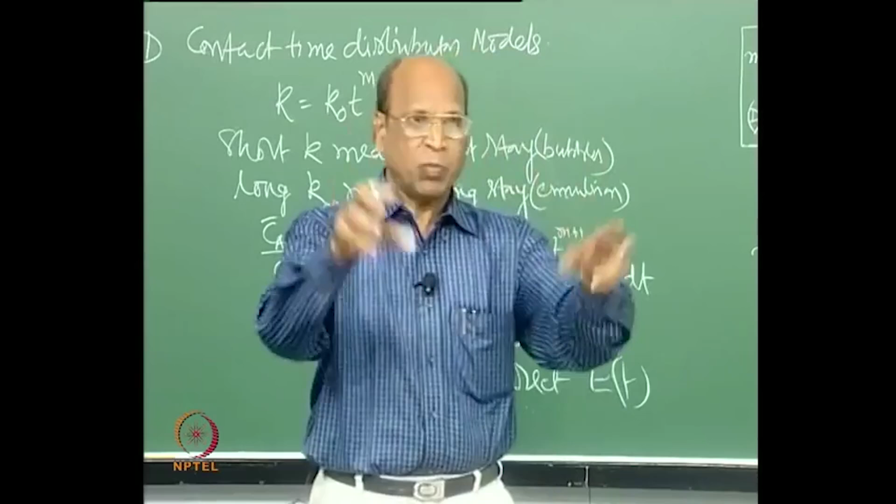You will have more solids near the bubbles, there are so many bubbles like that. So when the bubble is carrying with it a cloud and then the wake, you will definitely have slightly more conversion. Why we are not able to tell anything is we do not know, depending on the velocities where we are, whether we are having no cloud at all.

Cloud thickness will reduce to almost zero if UBR, the bubble rise velocity, is very high. So sometimes some bubbles may be slower, and this group B and group A particles that we have discussed - some group A particles behave differently, group B particles behave differently. You will get exploding bubbles, fast bubbles, very slow bubbles, all these things will come. All that we never had any idea earlier.

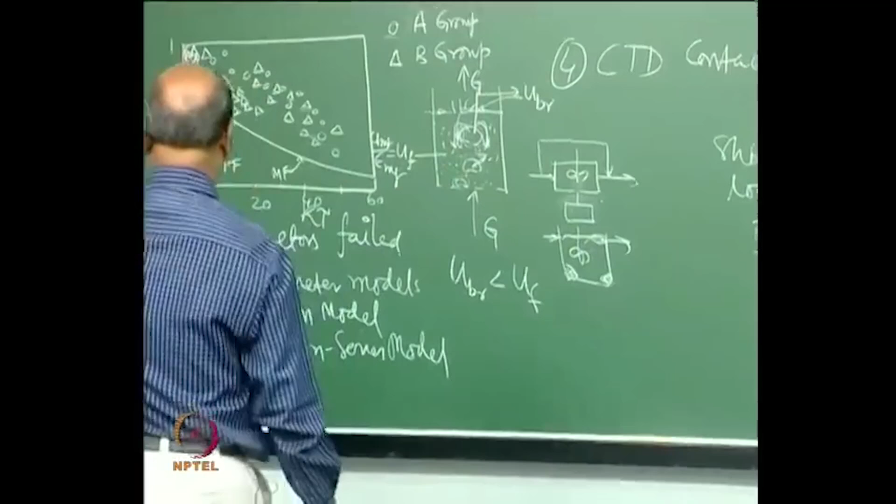That is why all the data - some people may be operating in a very fast bubble regime, some people may be operating with group B, and some people may be operating with group A. All that data when you put together, what else do you get? Only a cricket field, only a spread, correct?

Throughout spread, particularly after 20 overs or 10 overs now. Yeah, now it's T20, no? Otherwise if it is 50 overs, one day cricket, I think after 10 overs they will spread. Yeah, this is after 10 overs spreading. So everywhere you will see the people running here and there. So that is the reason why we are not able to predict that beautifully.

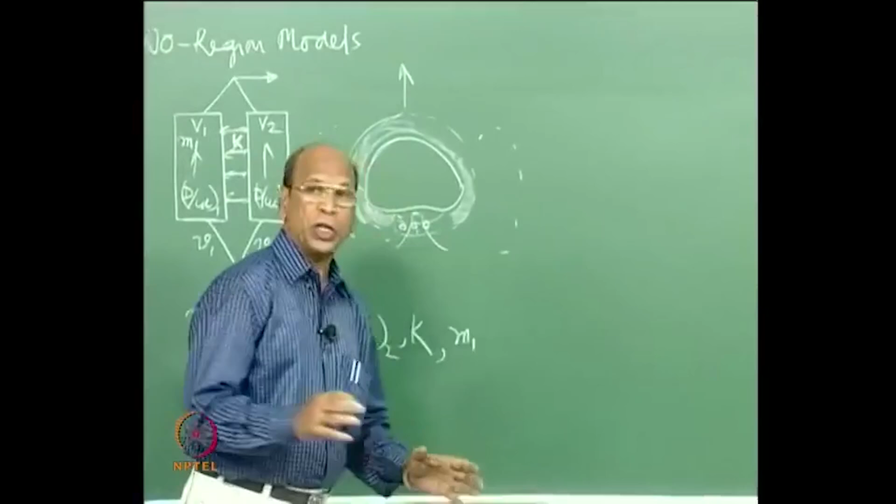So what they tried to do later was look into the hydrodynamics, and these are called hydrodynamic models, hydrodynamic flow models. I thought I will start that.

What is the meaning, Prabhu? Hydrodynamics means what? Lives up to expectation all the time. Okay, so that is the English meaning you are telling. What do you understand?

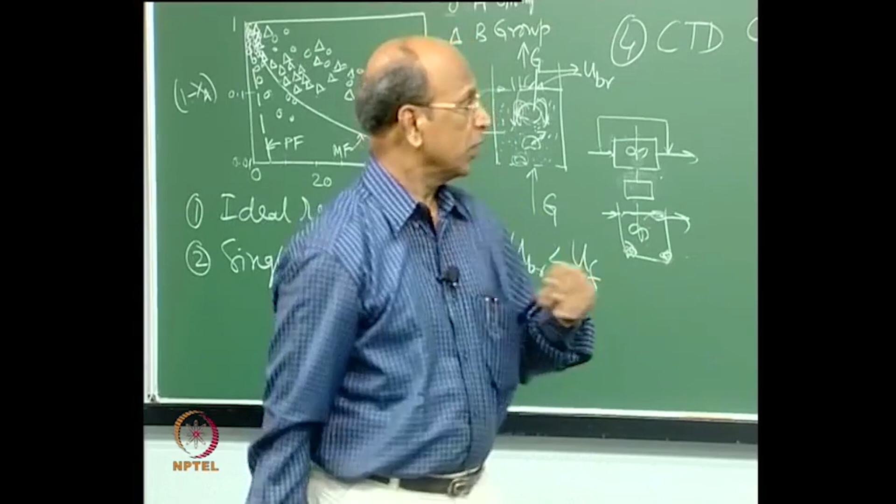Sir, how the fluids move inside the bed, sir. Yeah, good, right, common sense only. How the phases are moving within the system, if you have any equipment, and if you are able to find out how the phases are moving, whether, of course, the simplest thing is whether they are moving in plug flow or mixed flow and all that.

Hydrodynamics means not only just flow, what we see under hydrodynamics is the actual flows and also the hold ups. What do you mean by hold up? Prabhu, heard of it? Hold up, not heard? Renita, what is hold up? The space occupied by the bed.

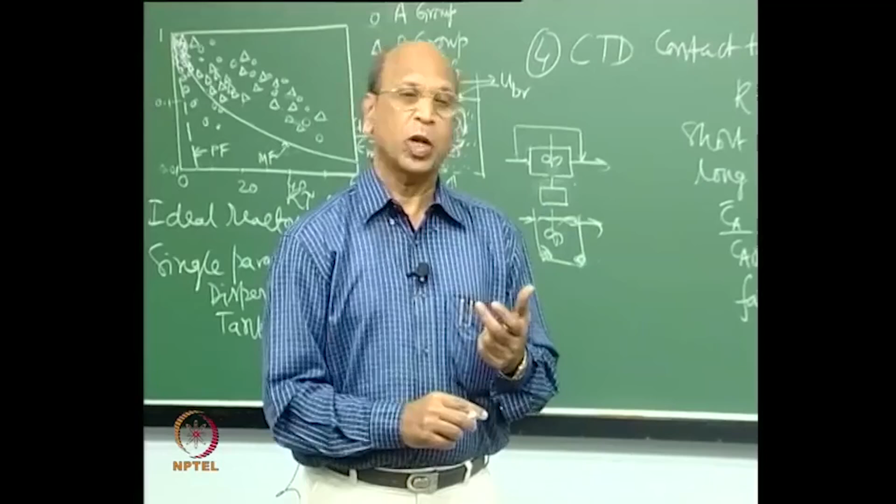Space occupied by bed by what? Why only liquid? Why are you always liking liquid? Hydrophilic, hydrophobic. Solid, why solid? Hold up is for all the phases - what is the fraction of a particular phase occupying the system, the reactor or any equipment.

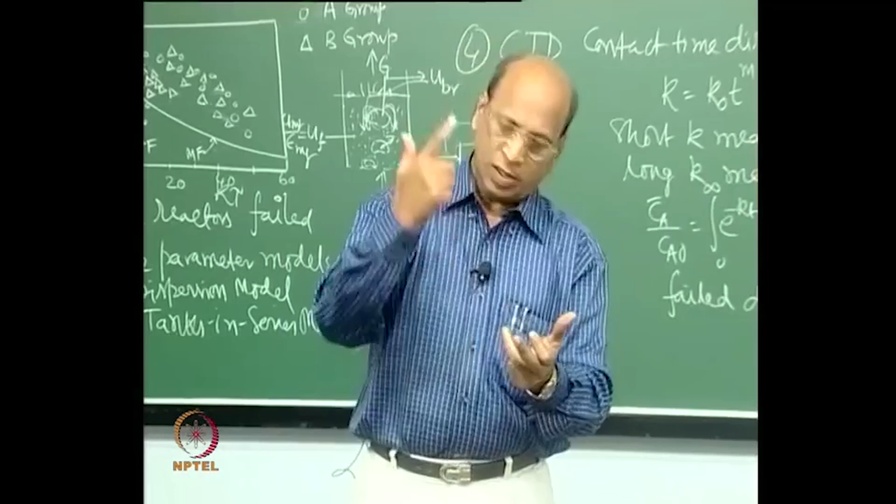So all those parameters, in fact not only that, even the flow regimes, under what conditions you will operate - like for example, fluidized bed can never be operated beyond terminal velocity and also before packed bed. No, that is the minimum fluidization velocity. So that is the flow regime for that. Under hydrodynamics you will get flow regimes and velocities and UMF, for example UT, all that.

And then you will also get the hold ups and also the pressure drops. What is the pressure drop? When you are sending so much gas or liquid or both, what will be the pressure drops? All this will come under pressure drop, and this hydrodynamic flow model will give me information about all that. But in this particular case, they mainly concentrated on the bubble flow.

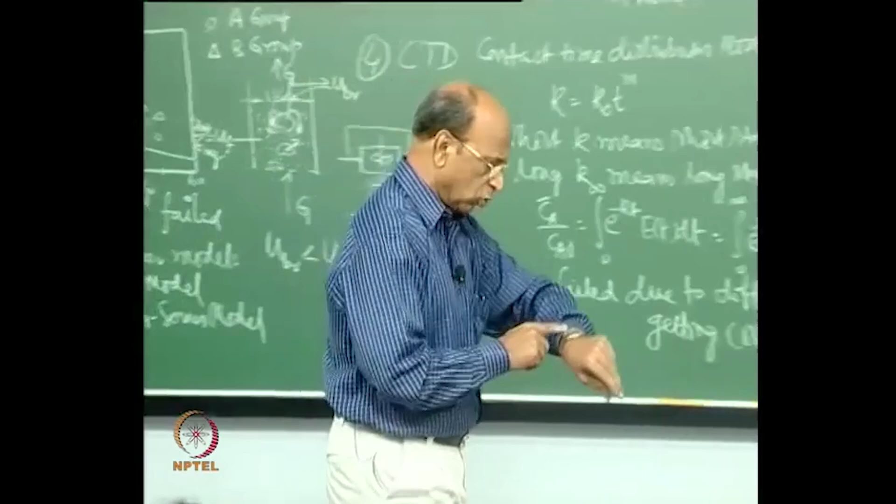Okay, I think I have to close here. You have to run. Okay, so then I think I have to bring this again tomorrow. I have brought these things anyway, but if I give this, you may not bring it tomorrow, right? So I think I will bring it tomorrow and then give it to you. So the entire fluidized bed reactor design is in one page here.

This I will tell you in the next class. Okay, thank you.